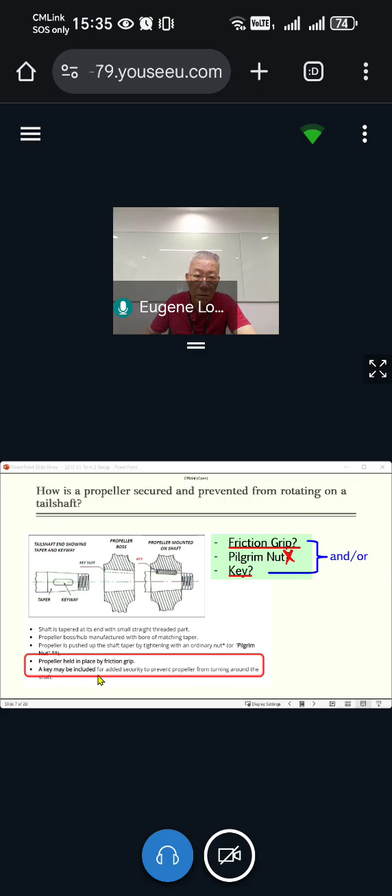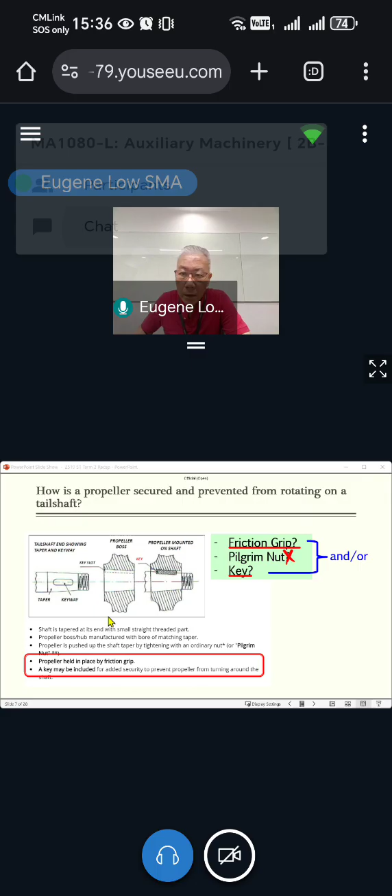Okay, thanks, Zafan, Marquez, and Adriana and Wei Ming. Yes, okay. So I'm not so sure what happened with Jon Snow. Whoever that may be. You guys know who is Jon Snow? Okay, anyway. Is that the Jon Snow from Game of Thrones, right? Hopefully Jon Snow can get back soon. LMAO. Okay, anyway, let's move on.

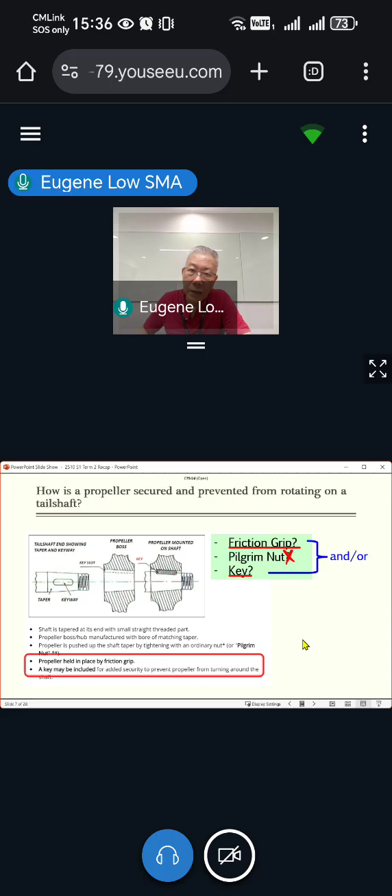Okay, next, what is the function of the thrust block? Again, it's all in the slides. Function of the thrust block: to accept thrust produced from propeller and distribute it evenly to the ship structure. I think if your fonts are not too big, this is just a one-line statement. So accept thrust, or you say receive thrust, fine, distribute evenly to the ship structure. That's very important, so that the thrust does not end up in the main engine.

Okay, that's an easy one. Next, what type of bearings uses the hydrodynamic lubrication type of lubrication, or the method of lubrication?

So I've touched on this, and I've also included a video on hydrodynamic lubrication, remember this guy talking about bearings, hydrodynamic lubrication, and bush bearings? I also included these in your Brightspace.

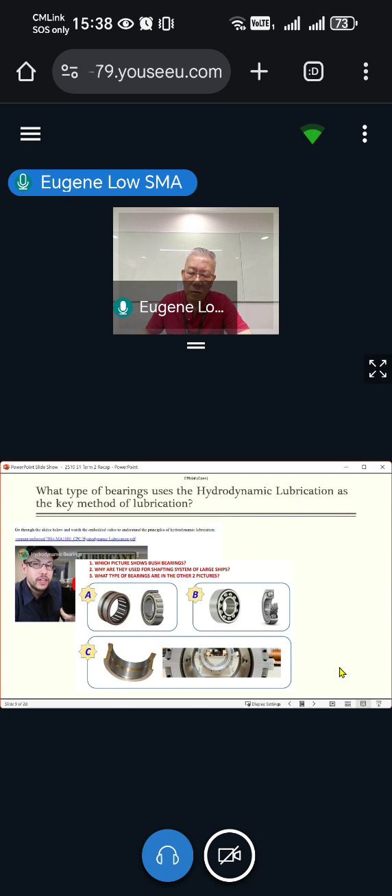So A is roller bearings, B is ball bearings, C is bush bearings. A and B, not really, they don't use that much of lubrication, basically they use rollers and balls to rotate. But for C, you are going to use hydrodynamic lubrication to lubricate.

So definitely, bush bearings. C, bush bearings uses hydrodynamic lubrication as the key method for lubrication. The stern tube is a bush bearing, so stern tube uses bush bearing. Crankshaft uses bush bearings.

Okay, what type of force should not act on the crankshaft? Again, this is for you to read carefully. You know the crankshaft has a lot of forces, but which type of force should not act on the crankshaft?

Is it the thrust developed by the propeller? If allowed to act on the crankshaft, it will critically damage the crankshaft. How does that statement sound to you? Now, the propeller's thrust force must be transmitted to the ship's hull through the thrust block.

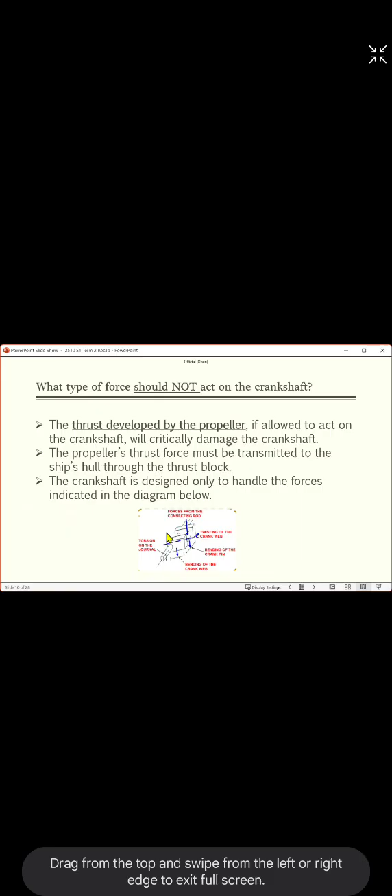Crankshaft. An engine crankshaft is designed only to handle the forces as in this diagram here: forces from the conrod, twisting of the crankweb, bending of the crankpin, bending of the crankweb, torsion on the journal. So that's what the crankshaft needs to deal with, all these five types of forces.

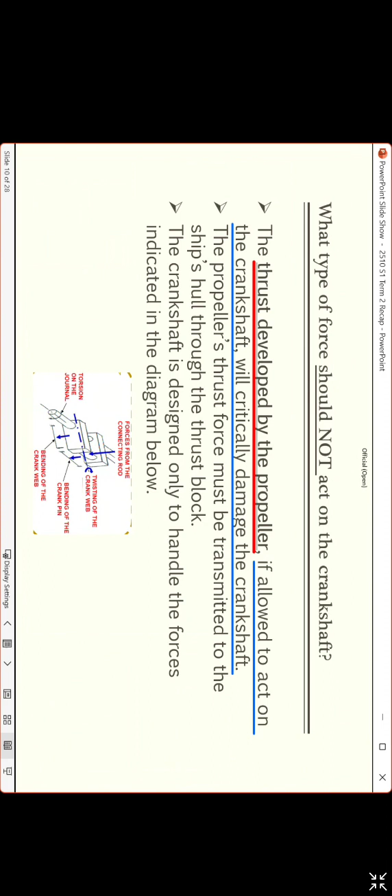But not the thrust force coming from the propeller, which must be redirected downwards to the ship's hull through the thrust block. So it is the thrust developed by the propeller, or the thrust force from the propeller, that should not act on the crankshaft. Otherwise, the crankshaft is going to be critically damaged.

Next, what is a key advantage of a ship's bow thruster? Of course there are more than a couple of advantages, but let's look at your notes on thrusters, why the need for thrusters.

So bow thrusters, or sometimes stern thrusters, are fitted to cut down on the requirement of tugboats, or you could even dispense with them totally, especially if you have both bow and stern thrusters.

And why do we need tugboats in any case? Tugboats are required to shift the ship sideways when the ship is berthing or unberthing. The ship's propeller can't move the ship sideways. So that's the key advantage of a ship's bow thruster.

Next, international requirements mandate—mandate means a compulsory requirement—that a ship's steering gear shall be capable of doing what to the rudder? It should include at least one of these things.

I'll come back to this steering gear rules quickly once again. So before bush bearing, this was the slide: function of the thrust block. What's the function of the thrust block? The answer is there in your slide: function of the thrust block is to accept thrust produced from the propeller and distribute it evenly to the ship structure.

Right, I get it. Sometimes you guys paraphrase a little bit. When you paraphrase, the paraphrase sentence must have the same meaning. You must identify the required parts or components, if there are any, and it must sound the same, must provide the same meaning as it should be in your notes or slides. So must have a similar meaning.

You can paraphrase: to accept a thrust produced from the propeller, or to receive thrust. Accept, receive, no issue with that. But it has to be thrust, and you want to add thrust force. That's fine, right? Produced from the propeller, or instead of from, you say produced by the propeller. That's fine too.

To accept thrust produced by the propeller and distribute evenly to the ship structure. So distribute evenly to the ship structure. I'm not so sure if you have another way of explaining or paraphrasing that, but otherwise this statement itself is simple enough. I don't think you can even shorten it any more.

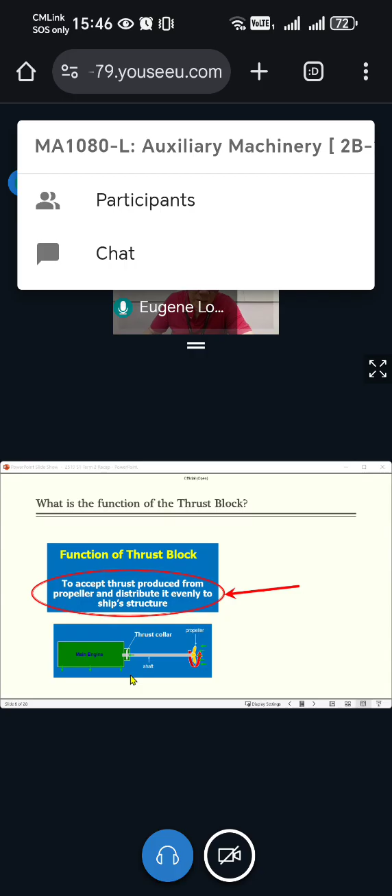Okay, all right, so I hope this is the one that Bryce is talking about. And Owen says basically an anchor. I'm not so sure, what do you mean, Owen, when you say basically an anchor? What are you referring to?

Thrust block. Oh okay, I think you missed the deck machinery in term one. Anchor is something hanging at the bow, on both sides, port and starboard side, the anchor. And what does the anchor do? The anchor is to hold the ship in a certain location so that the ship does not drift away.

You get what I mean? To hold the ship in one location so the ship does not drift away. So there's an anchor, you drop it onto the seabed. Thrust block, where's the thrust block? Thrust block is just near the engine, near the main engine. Thrust block is in the engine room.

Okay, so anyway, Owen, I think you got to thrust block. Oh, you say thrust block anchors the thrust produced by the shaft. Well, I think you can't use the same way of explaining, right? Anchor, to anchor something, right? Here you want to distribute the force evenly to the ship structure. You're not going to anchor it. Anchor means something is not moving.

But the thrust block is what makes the ship move, either ahead or astern, using the thrust from the propeller. So you want the ship to move. So you say anchor means nothing is moving. I anchor myself onto this nice chair here for the next 1 hour, not moving for the next 1 hour. So that's not the job for the thrust block. The thrust block is to move the ship. Okay, so don't use the word anchor.

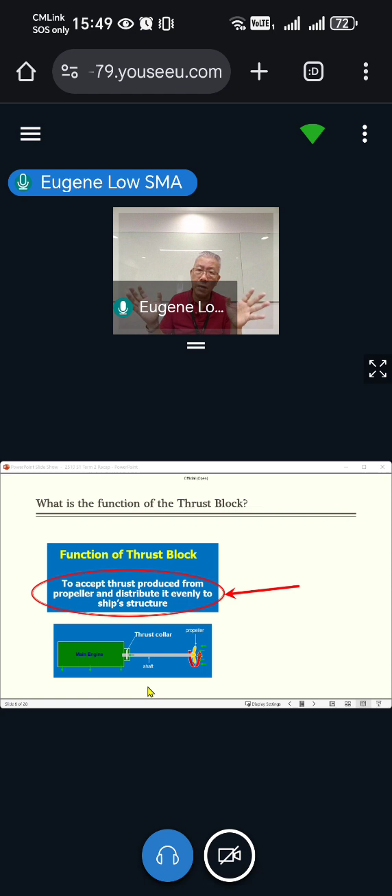Because when the thrust bearing gets burned, or the thrust shaft itself gets burned, when that happens, you've got to stop running the shaft. If you stop running the shaft, the ship is not going anywhere, and that's a huge problem. So that's why the thrust block is a very sensitive equipment. If the ship's thrust block has a problem, the ship is not going anywhere.

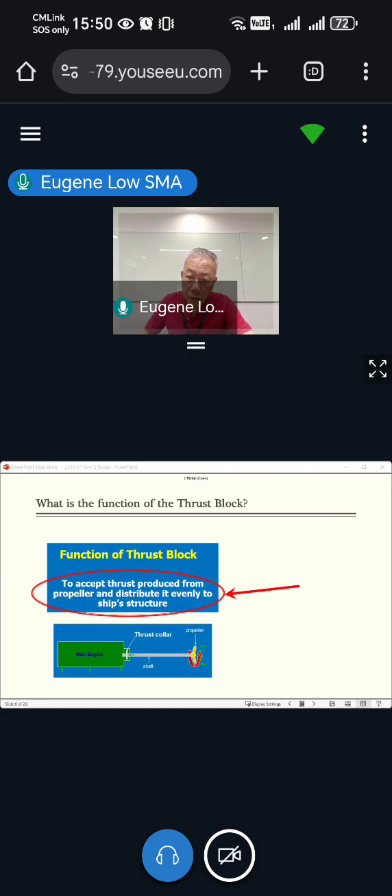Okay, but you can't say anchor, right? Then everything else on board the ship is also anchored. The ship's stove is also anchored too, but we don't want to say that, it gives a bit of confusion there. I know where you're coming from, Owen, but choice of words sometimes matters at the right time. I get what you mean, Owen, I hope you get what I mean too. Okay, I hope that's good for Bryce, let's move on.

Okay, function of thrust block, bush bearing. I think we've done that already.

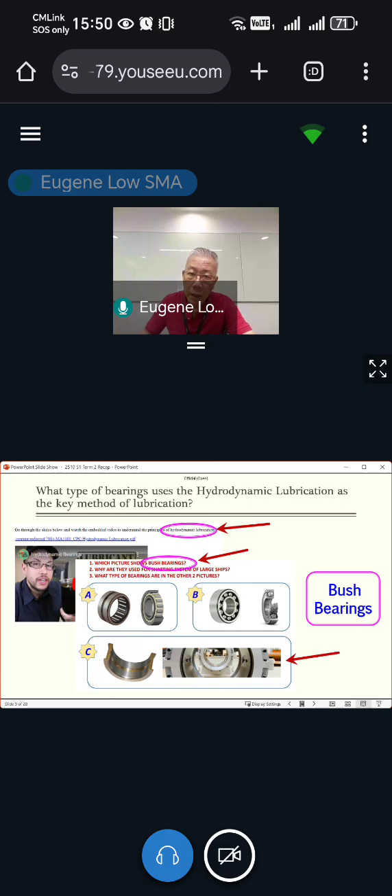Thrust force from the propeller should not go to the crankshaft.

You need to state 'from 35 degrees' because that gives you a sense of relativity, that something's going to move away from a certain position. So 35 degrees on either side, can be this side or this side. I'm talking about the rudder, 35 degrees from the center line. Center line, of course, is the midship position, which is 0. So I should say from 35 degrees on either side, which can be from this side or from this side.

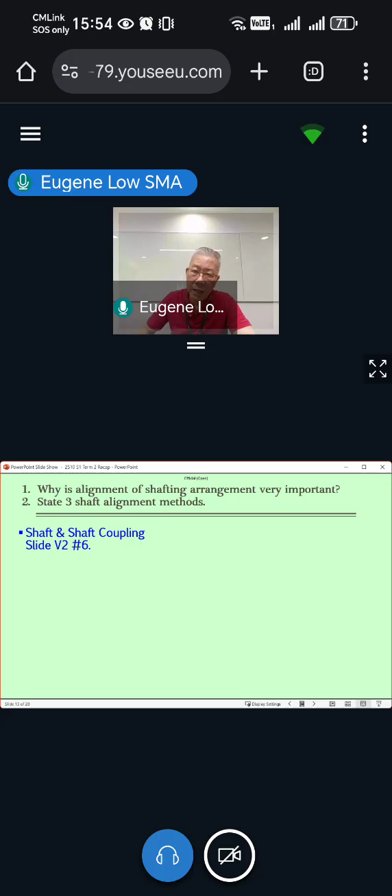Okay, moving on. The background color has changed a little bit. So let's do this, there are two sub questions here. Why is alignment of shafting arrangement very important? And the next sub question is state 3 shaft alignment methods. This goes back to the first topic of term 2, in this particular slide. So, you got this page here, shaft alignment importance.

Why is it important? Because the ship structure that the shafting system rests on is regularly experiencing a combination of hogging and sagging effects, loading condition, draft conditions, and wave conditions. Because of all these 4 items, they are creating stresses on the shafting system, all kinds of stresses: hogging and sagging stresses, loading condition stresses, draft condition, wave condition. So the shafting system is being twisted around, bent up and down, torsional also.

Okay, so all these things is why shafting alignment is so important, or alignment of the shafting arrangement is so very important. Of course you can paraphrase all this, it means the same thing. You just have to practice, and all this point form stuff is helpful.

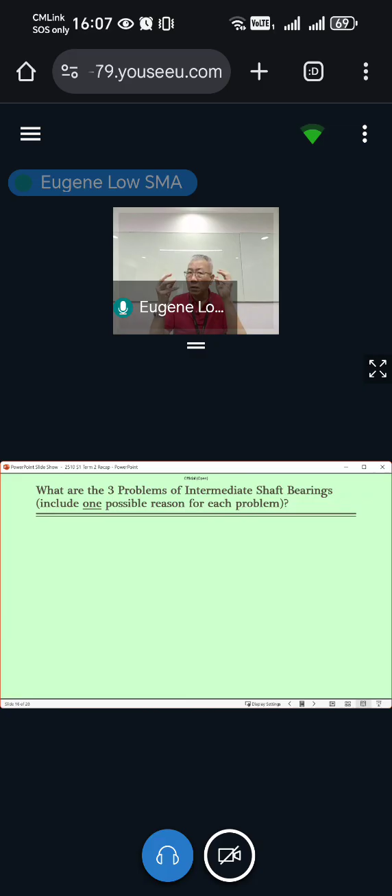Include one possible reason for each problem. So you know there's a problem, there is a reason. One problem, one reason. Each problem could have more than one reason, but you're required to state one reason for that problem, right? So three problems.

Okay, again there in your slides, 2 pages there. Problem associated with intermediate bearings. Number 1, lubrication failure. That is problem number 1, lubrication failure. And there are several reasons.

5 reasons there. Could be insufficient oil, contaminated oil, incorrect oil, failure of lube oil supply mechanism, could be cooling water, too much or too little. Okay, so just include one of those, right? Lubrication failure with insufficient oil or contaminated oil or incorrect oil or failure of lube oil supply mechanism or cooling water issues. All right.

Okay, and second problem is overloading. Overloading is caused by misalignment. Due to what reason? The main thing of overloading is usually caused by misalignment. And the reason for misalignment could be a local fire or grounding of the ship or normal extreme sagging, hogging of the ship as the ship goes through the ocean, right?

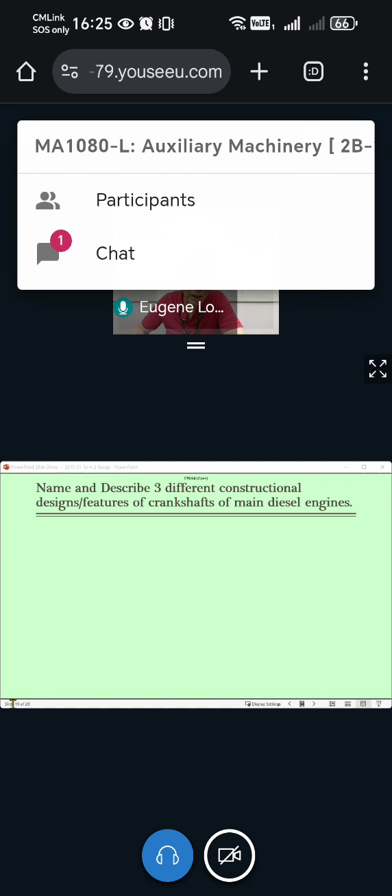Okay, next. Okay, let's look at what Hui Xian is asking. Must I draw the diagram along with the written answer? Diagram - I think I take it that Hui Xian is talking about the pilgrim nut diagram, right?

How do you use a pilgrim nut method to secure the propeller onto the tail shaft, if that's what you are meaning - no, not really, right? I mean, you can, but if you sketch this, it might help you with the sequence. But if you already have this in your mind, already projecting this in your mind, you can come up with the sequence correctly as well.

So okay, I can only say not really. If you are talking about whether you need to sketch this, I would say not really. You can, but you don't have to. You can include it also if you have time, but you don't have to. You should already have a clear idea of this in your mind.

I'm not stopping you guys from sketching this. Of course, if you want to sketch anything, make sure you sketch it correctly, because if sketched incorrectly, probably you're going to answer incorrectly also. There's a high chance of that happening. Okay, I hope I've answered Hui Xian's question.

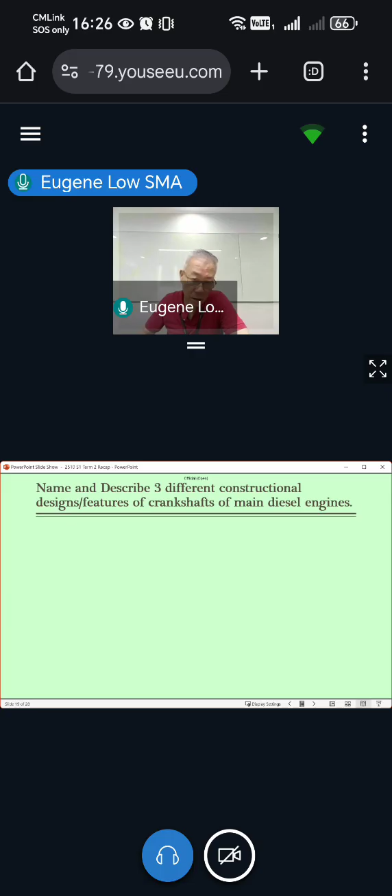Name and describe 3 different constructional design features of crankshafts of main diesel engines. Read the question carefully - it's not just naming, I must describe also. So what is a fully built type? All 3 parts are fabricated separately and webs shrunk on the crank pins and journal.

Webs are those flat pieces that are turning around. So the webs are fitted to the main journal, the journals, and the crankpin - journal in the middle, and the crankpin that swings around. All three parts, web, journal, and crankpin, are fabricated separately, and webs are shrunk, meaning shrink fitted, onto the crankpins and journal.

Remember there are 3 types. The second type is semi-built. Full, when we have full, you have semi also. In the semi-built type, you describe that the web and crankpins are fabricated as one unit.

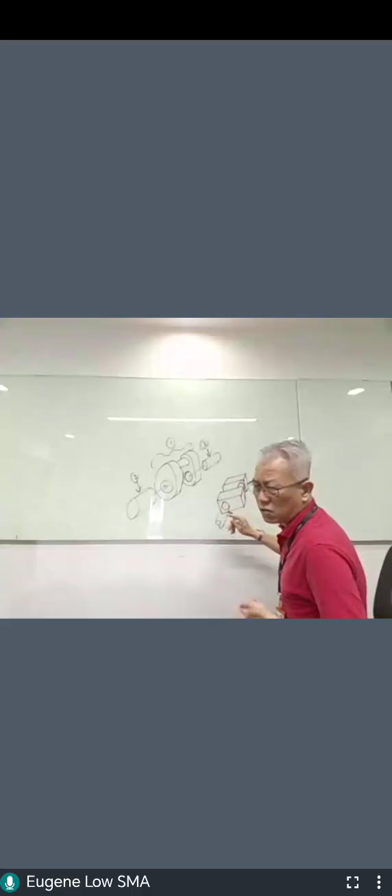I have my journal here, just draw a circle and draw two lines, same direction as these straight lines. Sketch with pencil so I can erase this - that's called neat, have to be neat. Since there's a journal here, the other end also has a journal, so I just go along here, another line here, another line here. So I already have my crankshaft for one cylinder.

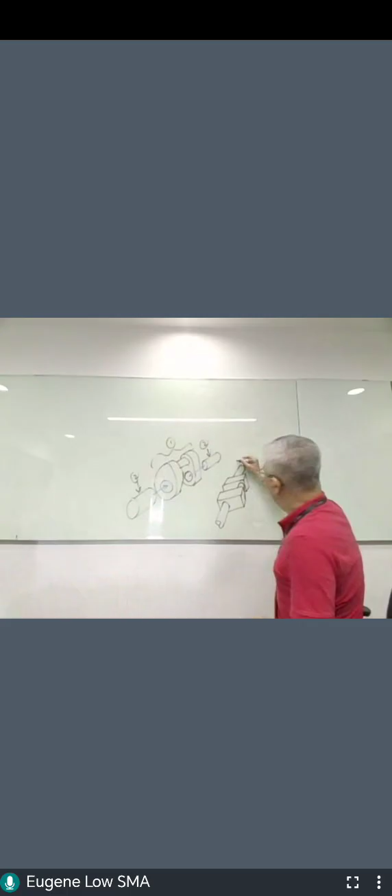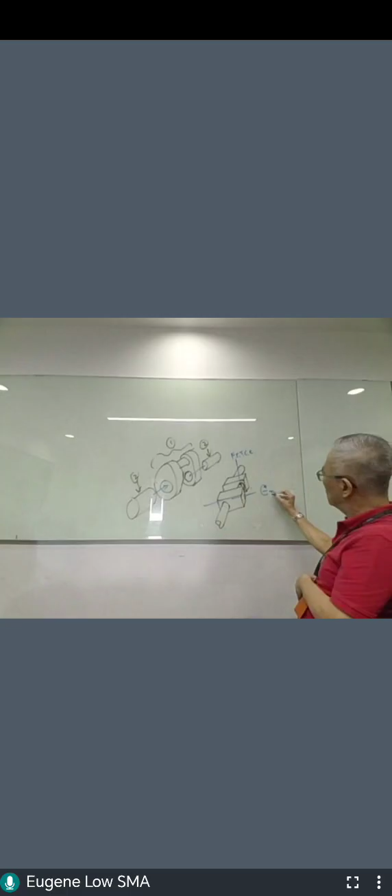So I have one of the main forces coming down here - arrow is important. Then there's forces from the connecting rod. Don't do this in your answer - full forces from the connecting rod. So when forces come down, these two webs will twist inwards in this way. I'm going to illustrate that for one of the webs, the center line of the web here - this arrow shows twisting of the crank web.

And then there's bending of the crank pin - these forces from the connecting rod cause bending of the crank pin. So how do I illustrate bending of the crank pin? I make something like a dimension line here, and I put an arrow here.

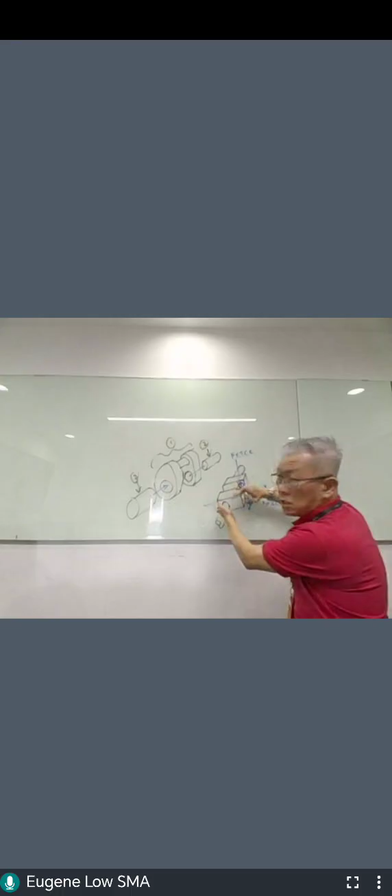Bending of the crank pin. Write in full, bending of the crank pin. And then at this position, the crank webs are trying to bend this way. Because of these forces from the crank connecting rod, the crank web will bend this way.

So in order to illustrate that, I just make a dimension line here also, and then I put an arrow here. Bending of the crank web.

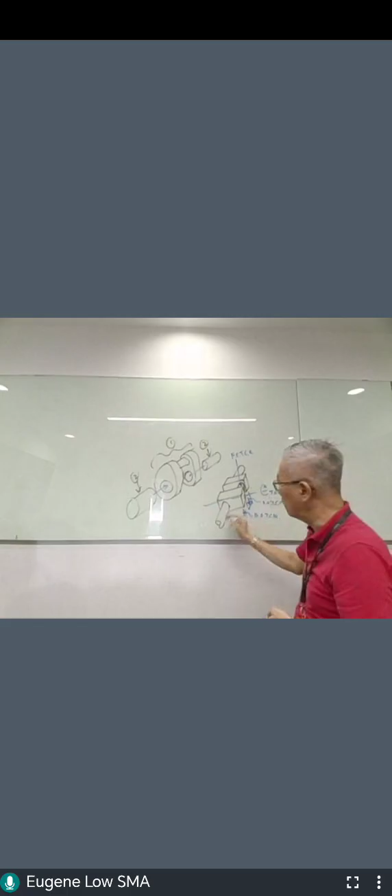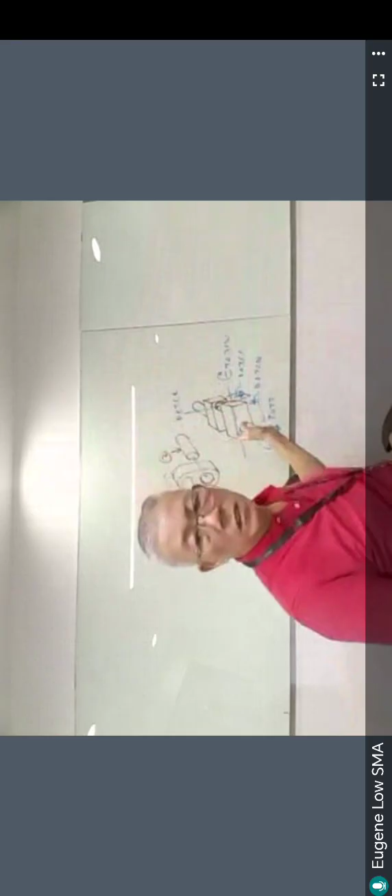And finally, I have torsion of the journal. Torsion of the journal. So I got my 5 forces there. This took me about 2 minutes. You can do it in 5 minutes, I think that should be fine.

Again, I'm using here whiteboard marker on the glass board, but you guys practice pencil on paper. It's all practice. Anyway, you've done that already, about 51 times. So all these things, don't forget. No short form, write them in full.

Okay, that's how you do a simple sketch. It's not too difficult, a sketch. Just start with the right things to do, then you don't miss out anything, and you don't sketch a funny object.

So with two shoe boxes here, standing shoe boxes connected by a toilet roll core. Inside the toilet roll, there's a crank pin, another two toilet rolls here. Those are the journals. There you go, you got a crankshaft already. You can make this at home.

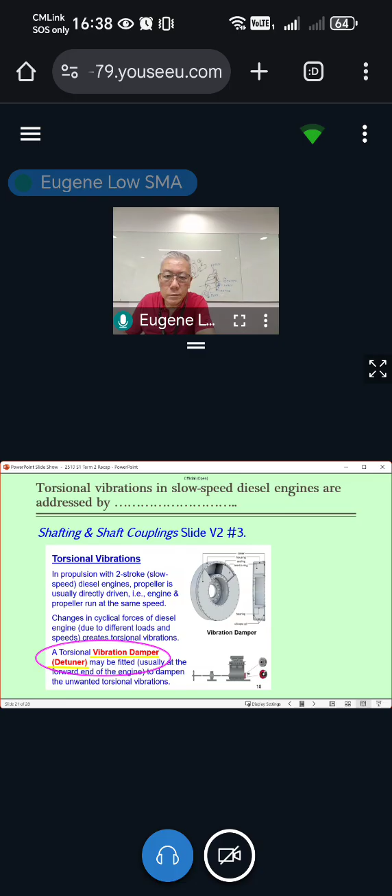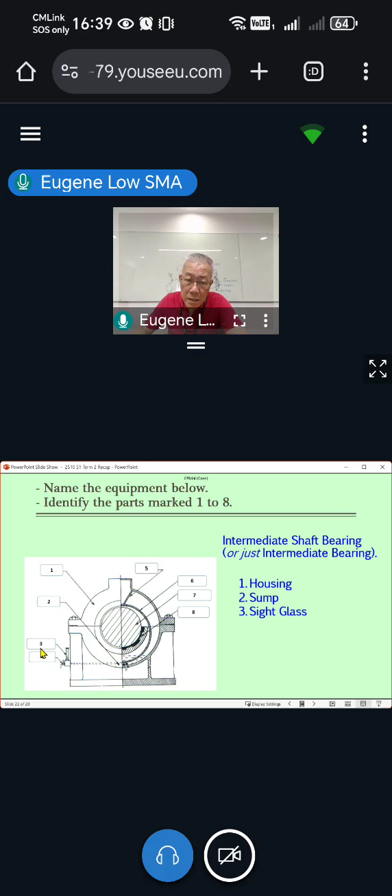Do I need to remember the arrows, remember the number, to remember the parts? Go by the arrow. There's the oil sump, or sump. Sight glass, if you write it as a level indicator, fine as well. Level glass, that's fine as well. Gauge glass, fine as well, right? They all mean the same thing.

Number four has to be the drain cock or drain valve, whichever way, that's fine, but it has to have a drain there.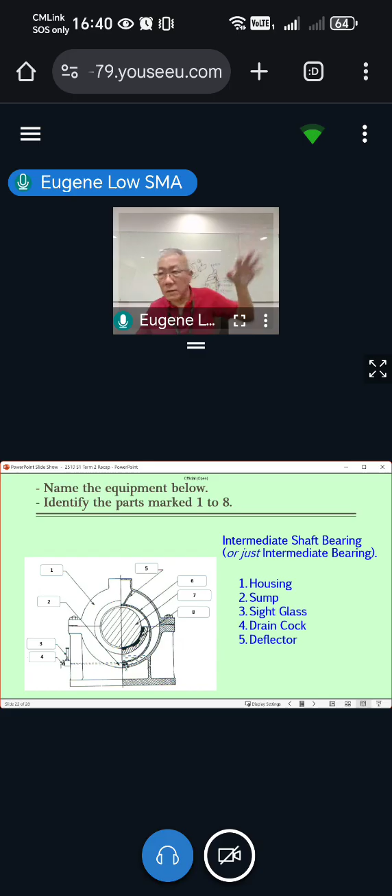Number five, this is a special deflector plate, so you can call it just deflector. Again, spell correctly: deflector, not defector. No defector, it's deflector. Listen to the difference there: defector, no, deflector, deflect, deflector. Not somebody who escaped to another country, that's called a defector. This is a deflector.

Lubricating ring, nothing else you can describe it as. This one, no choice, you've got to say lubricating ring. Well, if you short form it, that's okay, lube ring. Oh, okay, I get it, lube ring, that's fine as well.

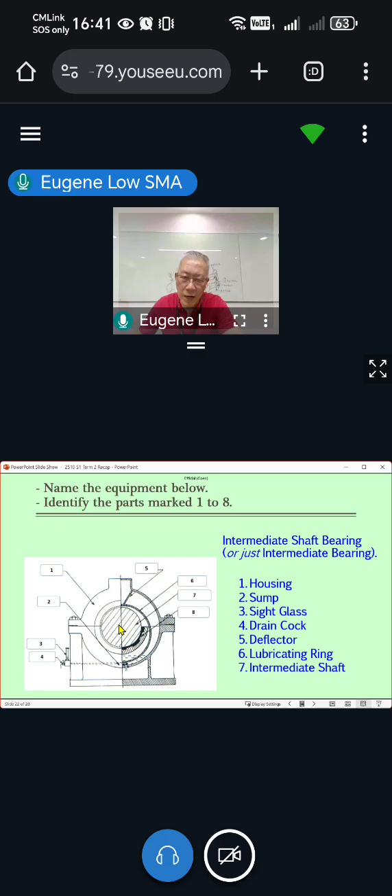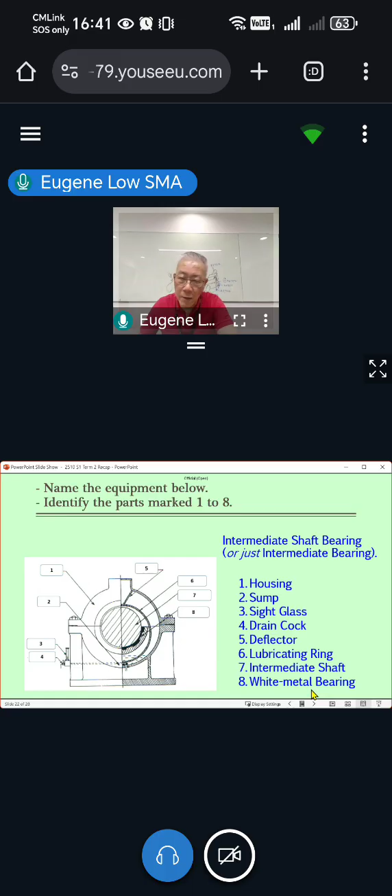Number seven, intermediate shaft. Of course, don't forget your main thing here is the intermediate shaft, so don't say this is a tail shaft or anything else, or crankshaft or whatever, it has to be an intermediate shaft. And this is the white metal bearing. So look where the arrow points to. The arrow points to this dark shaded part, so that has to be a white metal bearing, a white metal layer there. White metal bearing, can't be anything else. So all these 8 parts here.

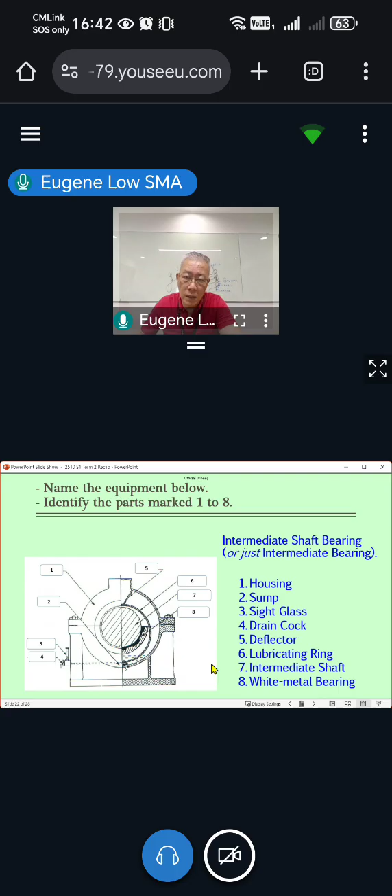Describe how the lubricating mechanism works in the equipment in the previous slide. Previous slide was the intermediate shaft bearing, right? So that lubricating ring basically is what you are going to describe. Again, in your slide, everything there. You can paraphrase it, but must mean the same thing.

When shaft rotates, lubricating ring gets rotated. You can say when shaft rotates, lubricating ring also rotates, fine, right? But the rotation of the lubricating ring carries lube oil to the top. Then you have to give me that impression, right? Rotation of the lubricating ring carries lube oil to the top.

You can say from the sump to the top. And when the oil goes to the top, it is the job of the deflector to help spread the oil over the shaft and bearing. You need not say splash lubrication - you can, but the main thing is deflector. Don't miss out that part. Deflector helps to spread the oil over the shaft and bearing, right?

Describe it in another way, as long as I get this whole picture, the same picture when I read it. That's fine. But don't miss out the deflector, don't miss out lubricating ring, right?

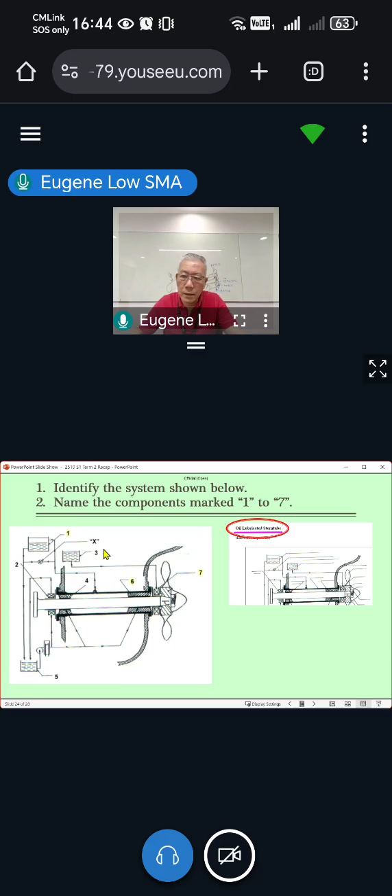So number 1, of course, is your header tank for stern tube. There's another header tank here, so you got to be very specific. Number 2 is your forward seal - know where the arrow is pointing to, right? If this is a forward seal, number 7 got to be your aft seal, right? So we'll come to that.

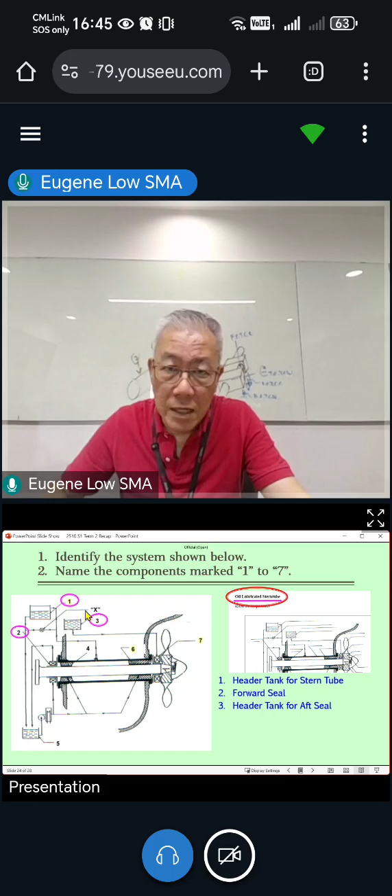Number 3 is a header tank for your aft seal. So if you already identified this header tank for the aft seal, number 7 definitely is your aft seal, right? So there's a header tank for stern tube and a header tank just for the aft seal.

Number 4 is the forward bearing, the forward part of the stern tube. Of course, you can write in short form FWD. And number 5, of course, is your sump or sump tank. Number 6 has got to be your aft bearing - it's okay to write bearing as BRG. And number 7, of course, not forgetting, is the aft seal. And that's it, your 7 items, right?

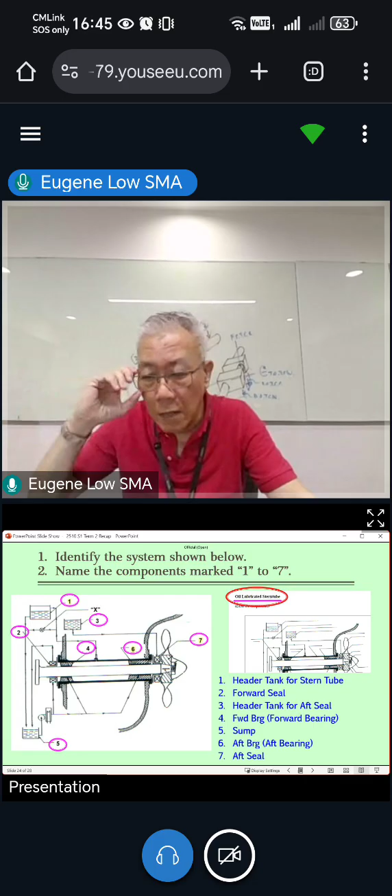Okay, same thing - you have done this in your weekly quiz as well. Zafan said the glass gauge.

You're talking about your intermediate shaft bearing, right? A gauge glass there. Glass gauge - I would advise you put it the other way around, gauge glass. So if you want to say glass gauge, might as well write gauge glass. I think technically that sounds better, right? Gauge glass. Okay.

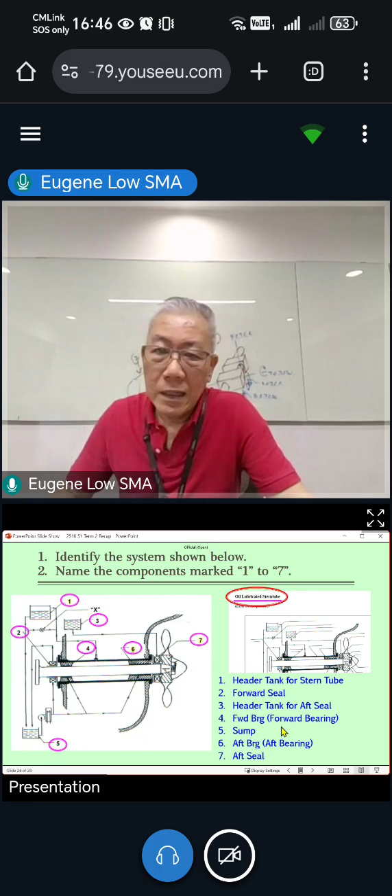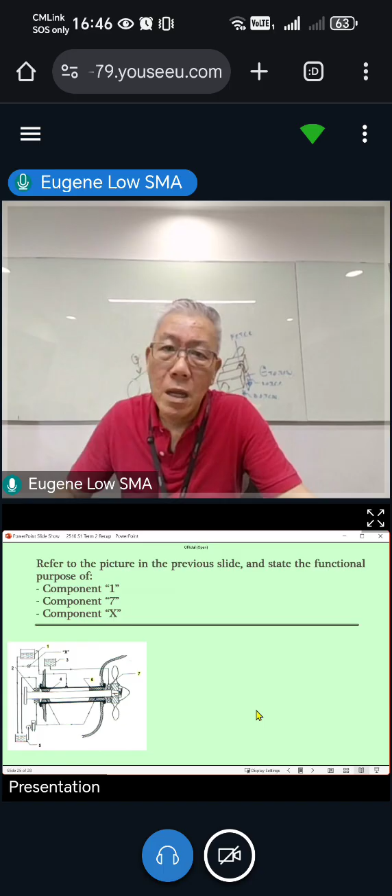Now, follow-up question to this - stern tube system, oil lubricated stern tube system. Refer to the picture in the previous slide. State the functional purpose of component 1, 7, and X. Okay, again, we have done this in your weekly quiz.

Component 1 is your header tank for stern tube, and that's to create an adequate lube oil pressure to counter the effects of hydrostatic pressure of seawater outside. So you want the lube oil to be higher than the seawater level outside, so that the hydrostatic pressure inside the stern tube is slightly higher than the seawater hydrostatic pressure outside, so that the seawater does not go into the stern tube, has no chance to force its way in. You can paraphrase it, but it must have the same meaning.

Okay, let's leave X to the last. Go straight to component 7. You have identified aft seal already, right? If the previous component you identified as something else, then obviously you can't answer this. But you can't go wrong, because number 3 is your aft seal header tank, so number 7 definitely is your aft seal.

Assuming you have answered number 7 as aft seal, what is aft seal for? It prevents entry of seawater and dirt into the stern tube, and it prevents leakage of oil into the sea. So both ways.

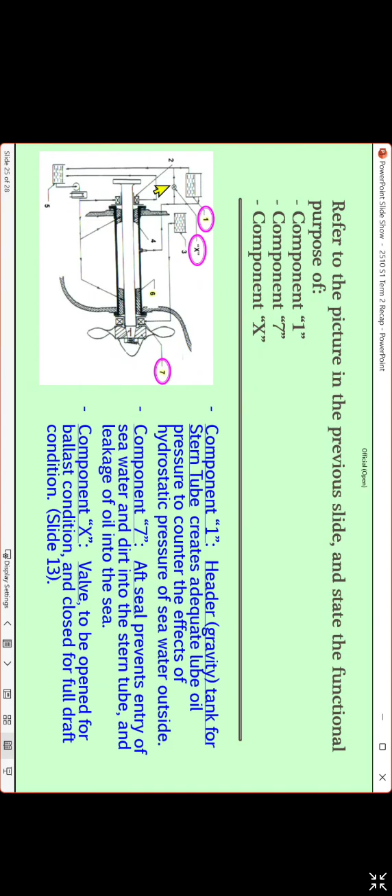Then we come to X, of course. X marks the spot there. It's called a valve. You want to call it technically a bypass valve, that's fine as well. Bypass valve, that is what it really is, but let's just call it valve. And what is it there for?

It is open for ballast condition and closed for full draft condition. I'm not going to spend time explaining why we close for full draft and why we open for ballast - I explained that in class already. So valve, open for ballast condition and close for full draft condition.

That's it. If you change full draft condition to full load condition, I'll give it to you as well - full draft means during full load condition. But ballast condition is ballast condition. Just to differentiate: ballast means the ship is floating higher up, full load means the ship is submerged more. That's all. I hope that's clear for this particular slide.

Any questions, guys, so far? Okay, a couple more slides. I think that we are done.

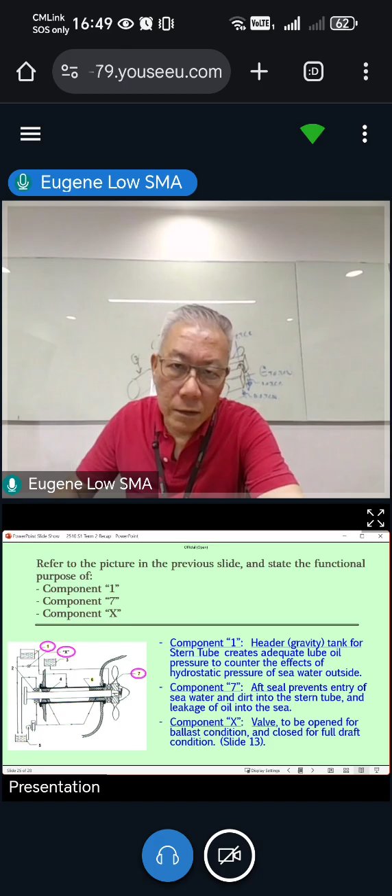So let's answer number 1. Of course, it's your Michell thrust block - that's how you call it. Michell is the inventor's name. If you call it tilting pad thrust block or tilting pad type, that's correct also, because this inventor invented a tilting pad thrust block. So you can answer saying tilting pad, fine, or just name the inventor's name, Michell thrust block. That's your answer for number 1.

Number 2, this is a sketch that you will need - I think it's much simpler than your crankshaft. The top part is your thrust shaft, and this thing around it is your thrust collar. This is like looking into the thrust block from the top, or from the side, but easier to visualize when you open up the cover of the thrust block and look down - this is what you see, the thrust collar there. Of course the thrust shaft and thrust collar have shaft on both sides, but just for illustration's sake, just to explain the principle of lubrication here.

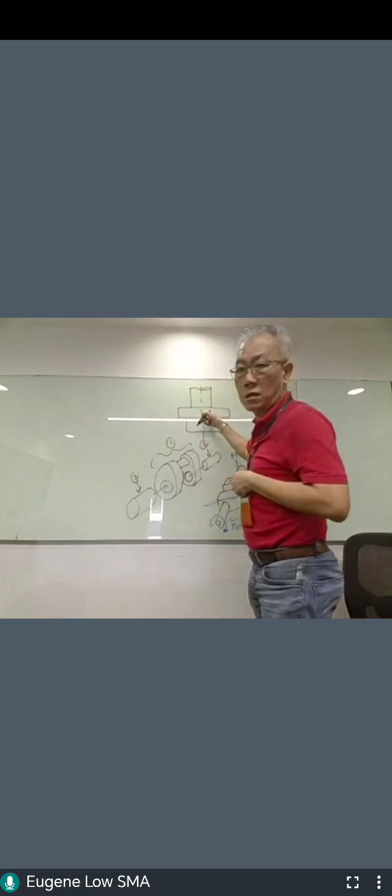Little bit of radius here. So that's my thrust shaft and thrust collar. And then I'm going to do this.

This part is critical, the tilting pad. Make sure you get this triangular shape there first, then you don't go wrong. First of all, make a line there so that you have this triangular shape. This triangular shape, and then the trick is not to make this touch here.

The trick is make sure that you have this line here that goes all the way to somewhere in the center, and then this goes to a little corner here and comes down. This part is going to touch the bottom here. Make sure it touches the bottom.

You can do a straight line, use a ruler. So this is the bottom part here. This point must touch the bottom. So it's this shape here, and here there are two thicknesses. The change is at the middle, right in the middle, not here, but right in the middle. And it's always good to give a little shading.

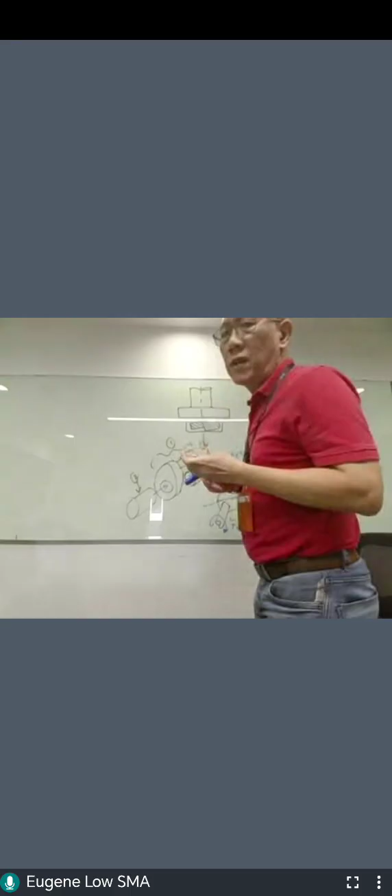Little shading there. I want to concentrate on that thrust pad there. Thrust collar, thrust shaft, thrust pad. And don't forget, I want to add a little bit of oil wedge there. You don't have to use a different color, but you can sketch a little triangle there.

Sketch a little triangle there, put little dots in there. That's to represent the oil film. Then you go on to label them. Of course, you must have a big arrow here.

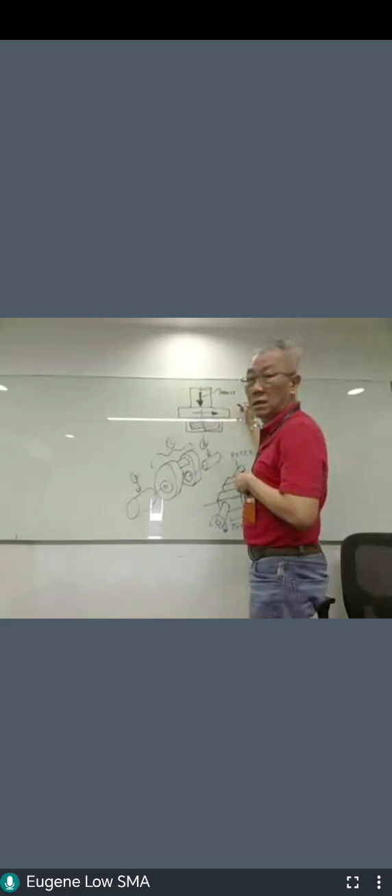Thrust, thrust from the propeller. And then you have another arrow here to show that the thrust collar is rotating this way. Label this as the thrust collar.

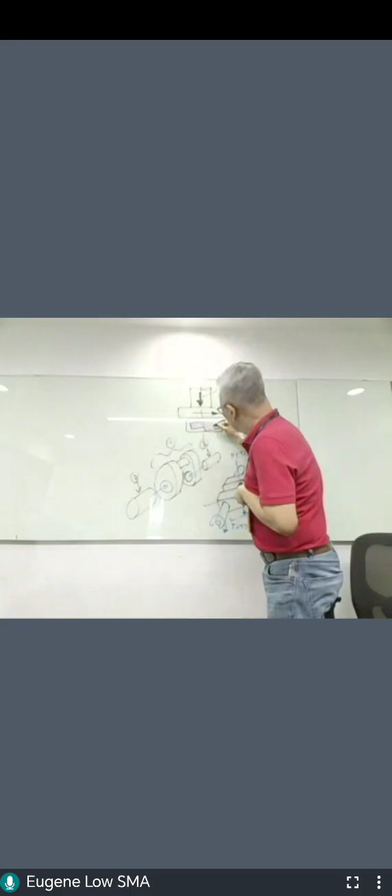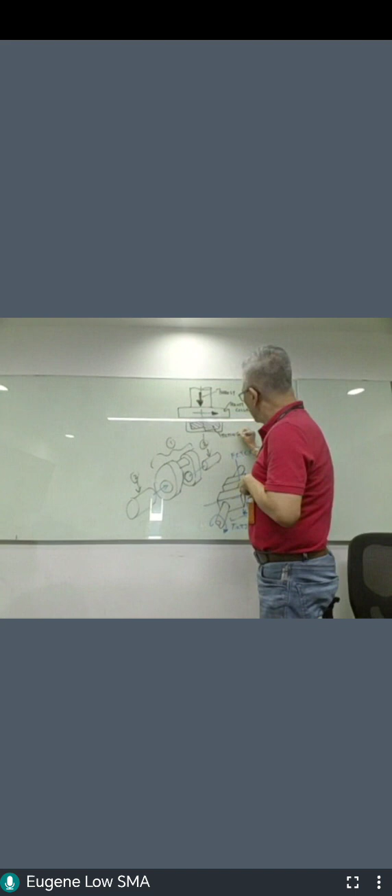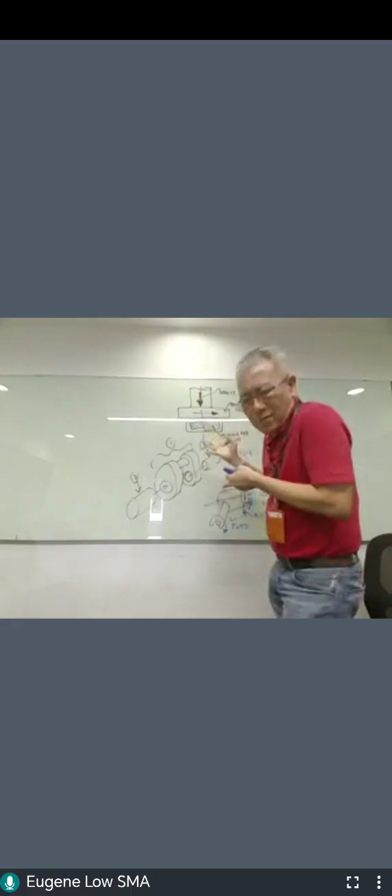Label this as your tilting pad. You can say the tilting pad tilts. Of course, we know the tilting pad will tilt.

Very, very importantly, don't forget, label this oil wedge. Oil wedge, of course, oil wedge forms. Oil wedge, that's very important. So that's it.

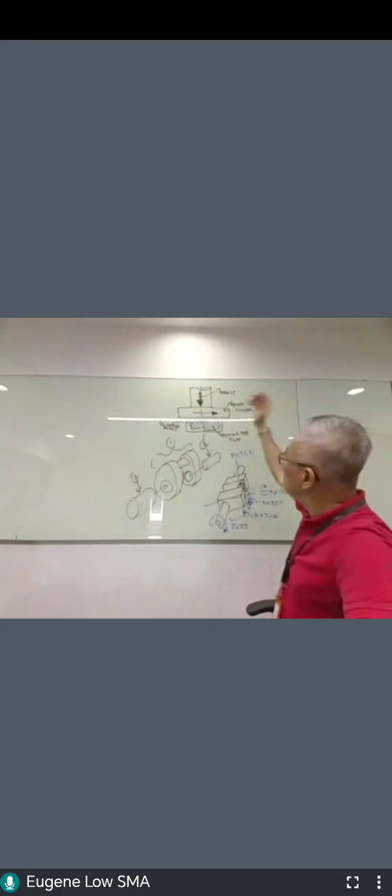I'll give you 5 minutes, more than enough to do this. Again, practice. And of course, your stationary housing, this part here is your stationary housing, this part here.

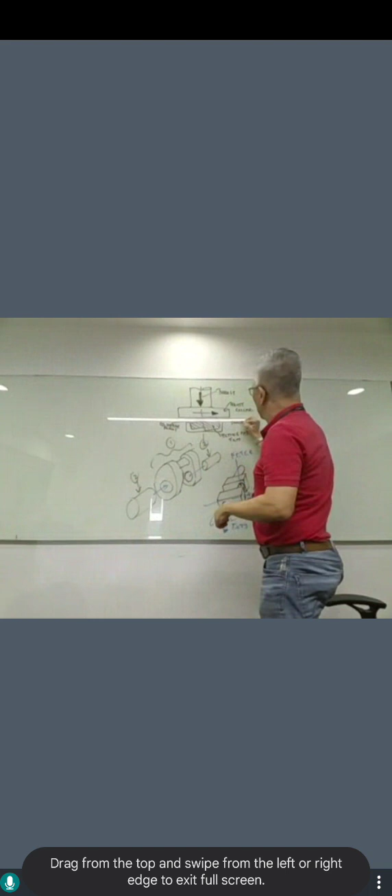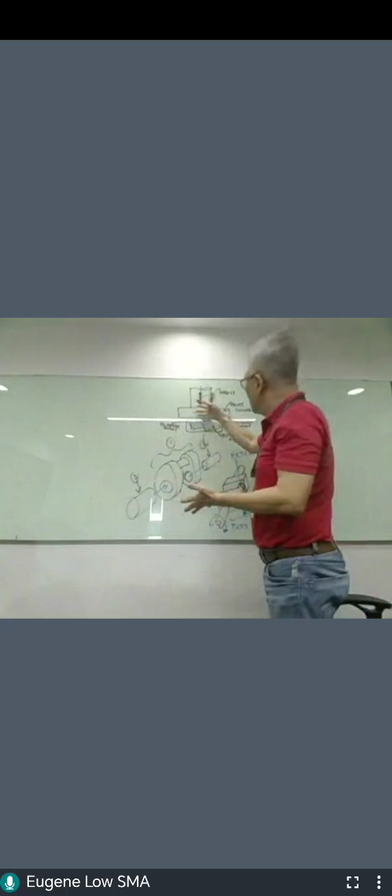Use a simple sketch to explain. So simple sketch, explain. Explain is here: oil wedge. Main thing here, all this is so that you can form an oil wedge here.

This oil wedge is going to give you the oil that is going to go inside here. The gap is getting smaller and smaller, so that the pressure of the oil film builds up to a few hundred bar here, and it is due to this buildup of oil pressure that keeps the surface of the thrust collar away from the tip of this tilting pad here.

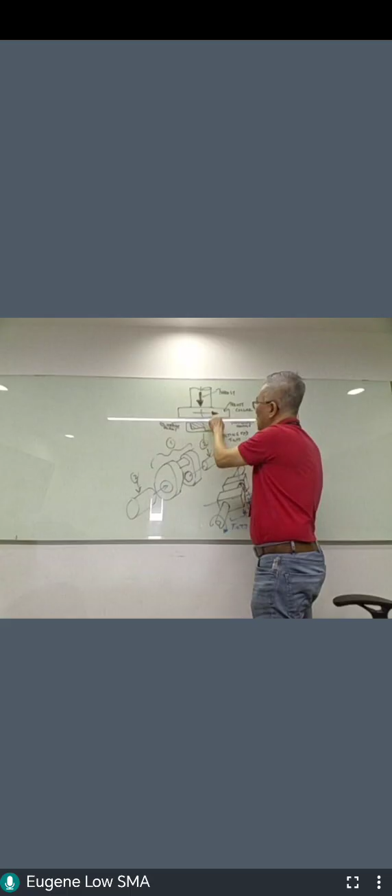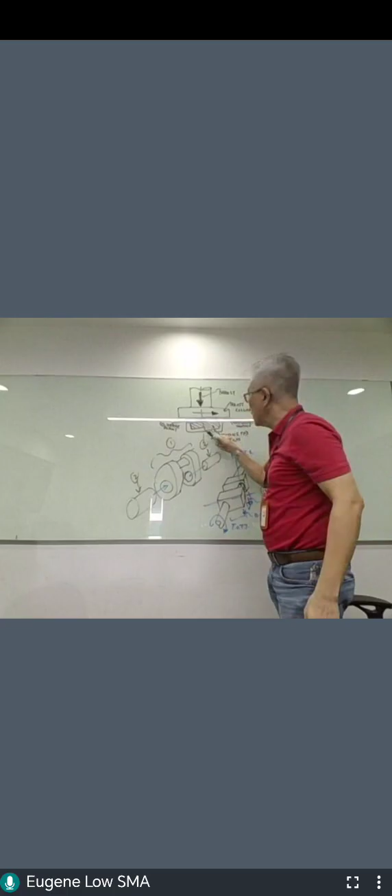Through this oil film, the whole thrust of the propeller shaft gets transmitted from the thrust collar to the tilting pad. And it rests on this point here and goes into the stationary housing. And from the stationary housing, it projects downwards to the ship's structure, so the ship will move.

And there are at least 6 of these, 6 of these pads.

Now the question says very specifically, use a simple sketch to explain. It doesn't say use a simple sketch and explain. So this is enough, sketch and label, that's all. This is called 'sketch to explain.' 'Sketch and explain' means you need a sketch and some paragraph to explain. But here, 'use a simple sketch to explain,' so this is good enough, everything there.

All right guys, once again, practice, practice, practice.

This is going to be the last thing I'm going to talk about. Why are thrust blocks usually positioned next to the propulsion machinery, next to the main engine at the aft? So again, the question is there, the whole thing here you got to state: next to the propulsion machinery, so that the effects of differential expansion of shaft and hull are reduced.